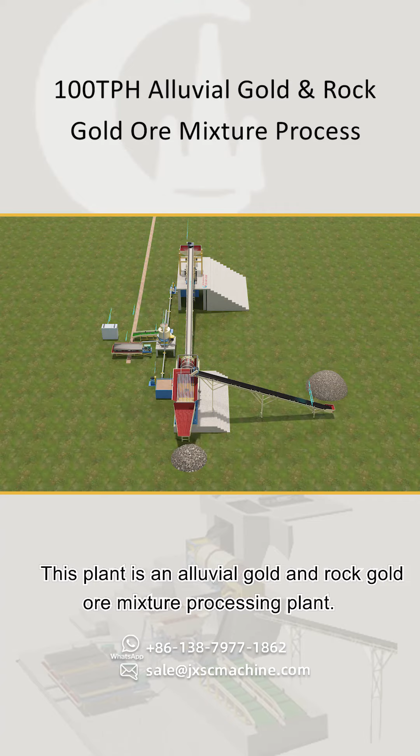This plant is an alluvial gold and rock gold ore mixture processing plant. The capacity can be customized as per request, such as 10 TPH, 50 TPH, 100 TPH, etc. For example, the plant is processing 100 TPH raw material as alluvial gold and rock gold ores.

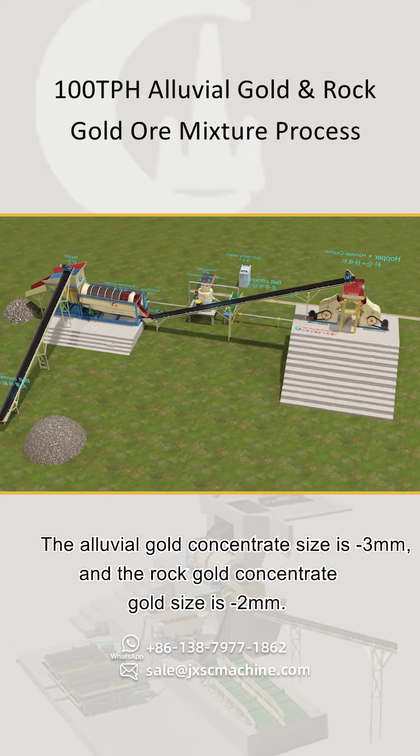The max feeding material size is 100 mm. There's no sticky clay in the mine. The alluvial gold concentrate size is less than 3 mm, and the rock gold concentrate size is less than 2 mm. The plant will begin from the feeder.

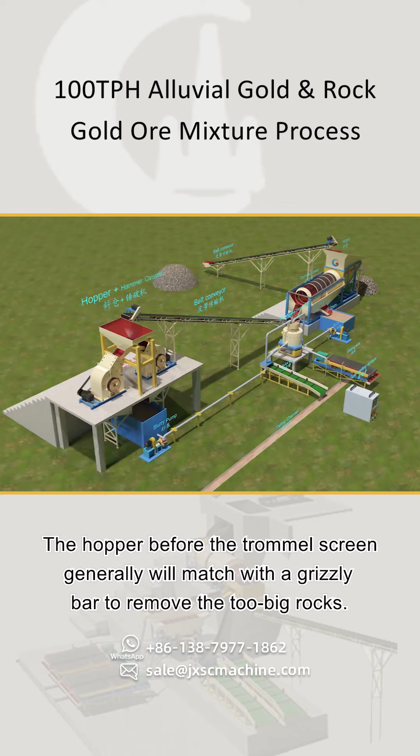The client requires a belt conveyor to feed raw ores to the hopper in this plant. If you use an excavator, then no need for the belt conveyor. The hopper before the trommel screen generally will match with a grizzly bar to remove the too-big rocks. The gap can be 100 mm, 70 mm or smaller.

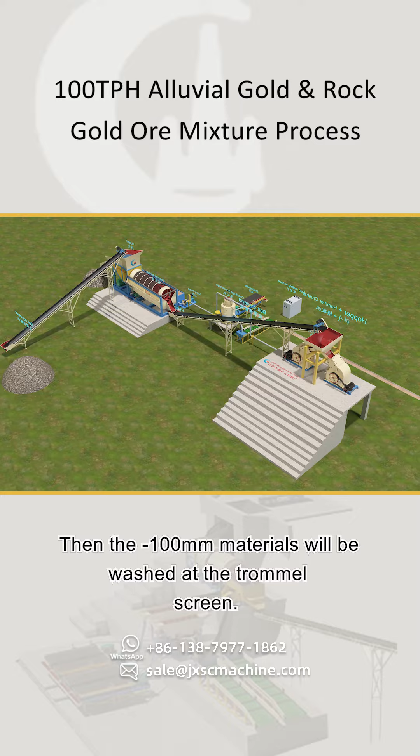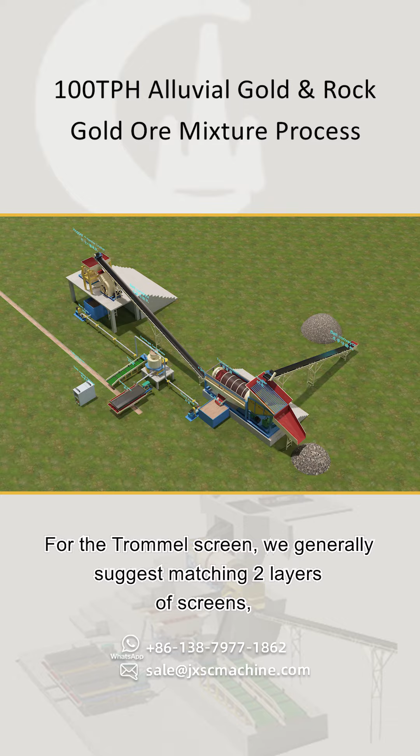Then the less than 100 mm materials will be washed at the trommel screen. If there's lots of sticky clay in your mine site, we suggest using a trommel scrubber to wash away the sticky clay. For the trommel screen, we generally suggest matching 2 layers of screens.

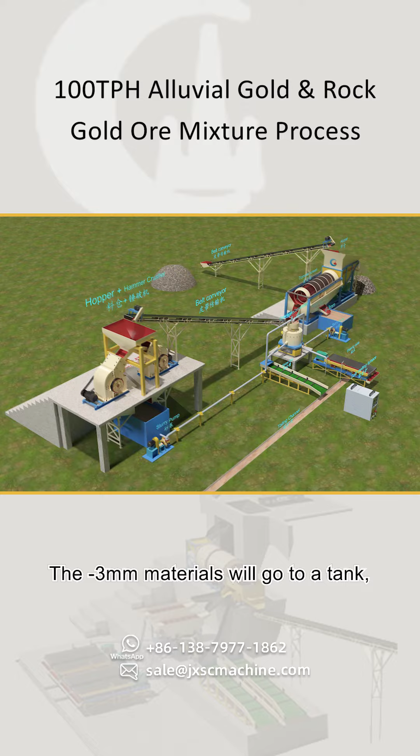One layer can be a steel bar, the gap size can be 25 mm or smaller, and another layer can be 3 mm, 6 mm, etc. The less than 3 mm materials will go to a tank. The slurry pump will send the slurry to a centrifugal concentrator to process and separate gold.

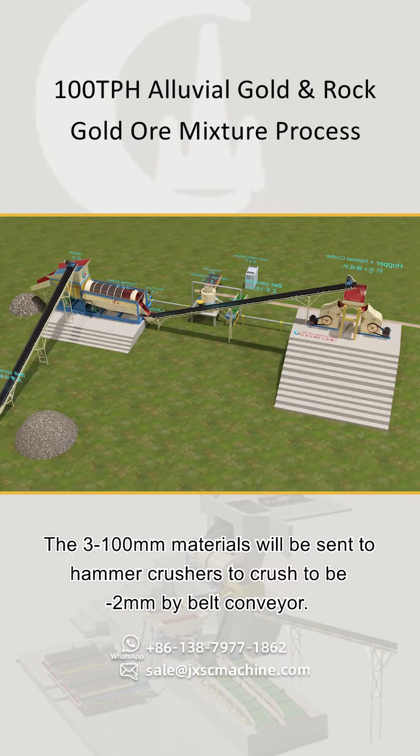The 3 to 100 mm materials will be sent to hammer crushers to crush to be -2 mm by belt conveyor. The output from hammer crushers will go to a tank and be sent to the centrifugal concentrator by a slurry pump.

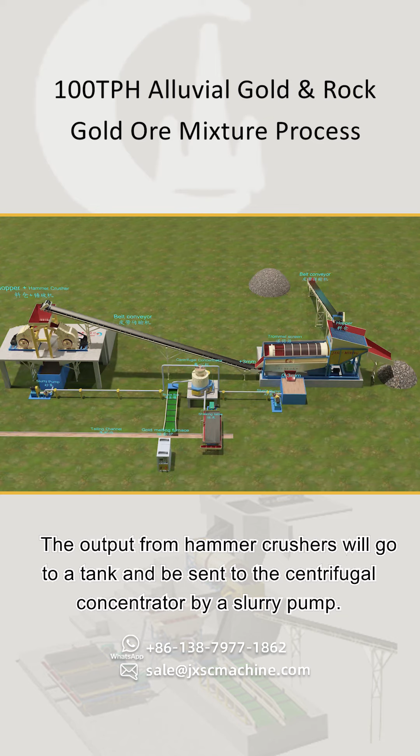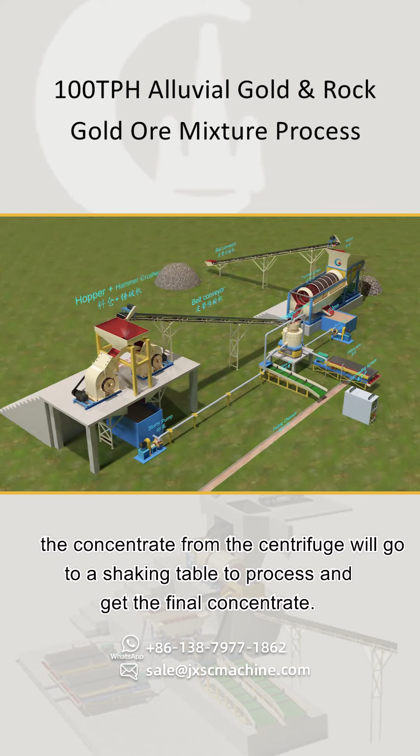After processing by the concentrator, the concentrate from the centrifuge will go to a shaking table to process and get the final concentrate. The tailings from the centrifuge will go to the sluice box to process and gather the gold in the tailings as much as possible.

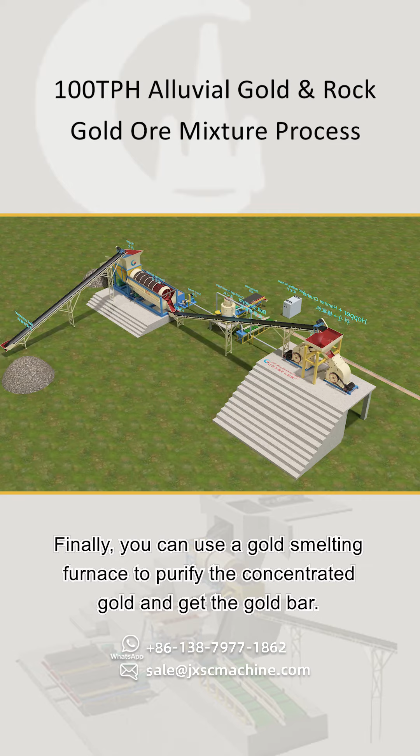Finally, you can use a gold smelting furnace to purify the concentrated gold and get the gold bar.